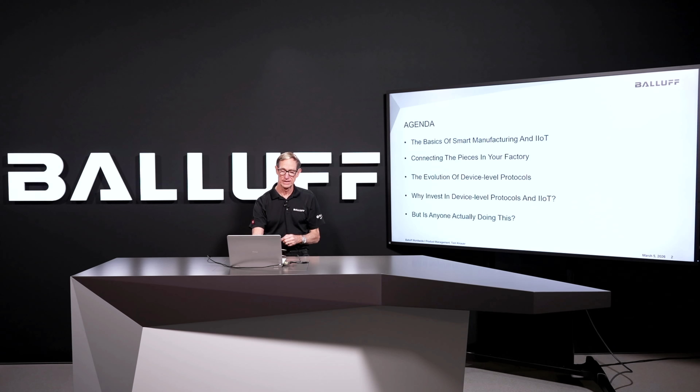Then why it's important to invest in the device level protocols and IIoT. And then we'll get into some real life examples of how people are using this, including a short video that takes you through an actual application with multiple different aspects of a factory and how those are all connected together and how that data can move up into higher levels of the factory wherever it's needed.

So let's get started. So some of the key trends that are driving the manufacturing world include things like changes in the workforce, inflation, tariffs and trade issues, constant pressure to reduce costs, use of energy, shorter supply chains, mass individualization and lower product counts in terms of high volume, low mix, and also at the other end of the spectrum, high mix and low volume.

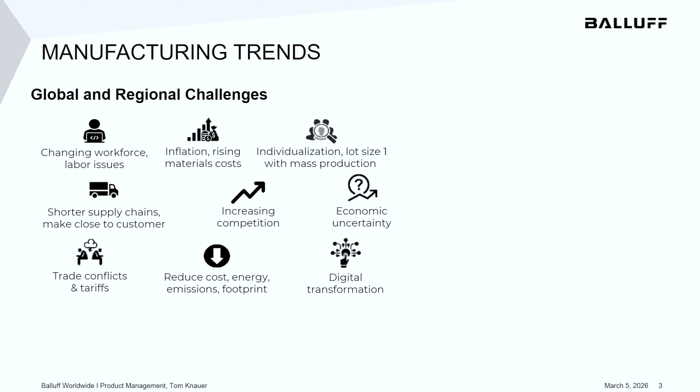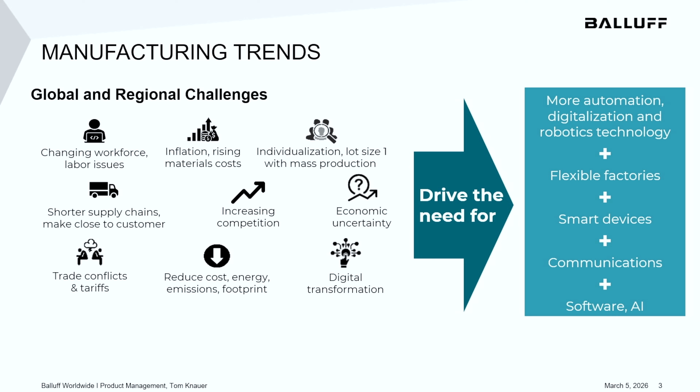These things drive a broad range of needs in the automation world. Primarily things like more automation, digitalization, and robotics, more flexible factories, smart devices, the communications to connect those smart devices, and then software and AI all play a role in bringing this picture together to help manufacturers address these key cost pressures. Really, the key thing here is that manufacturers are constantly being driven and focused on being more efficient, getting more out of their equipment and their facility, and improving overall equipment effectiveness.

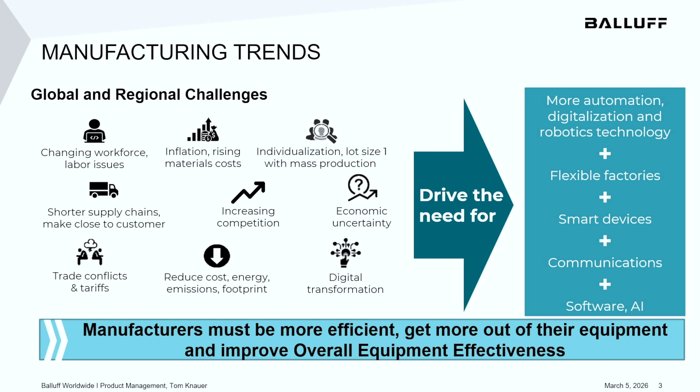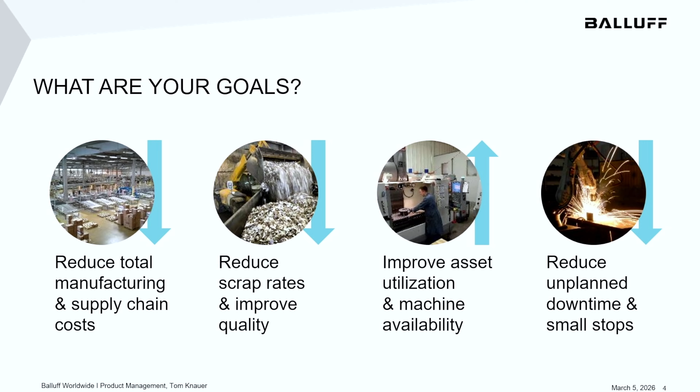What does this mean for your manufacturing goals? When we talk to customers, there's a variety of things they're focusing on when they're talking about overall equipment factory effectiveness and getting the most out of their factory. They want to reduce their total costs, both in the supply chain and the manufacturing side of things, reducing their scrap and improving their quality, improving asset utilization, machine availability and uptime, and reducing unplanned downtime and the small stops that occur that disrupt production.

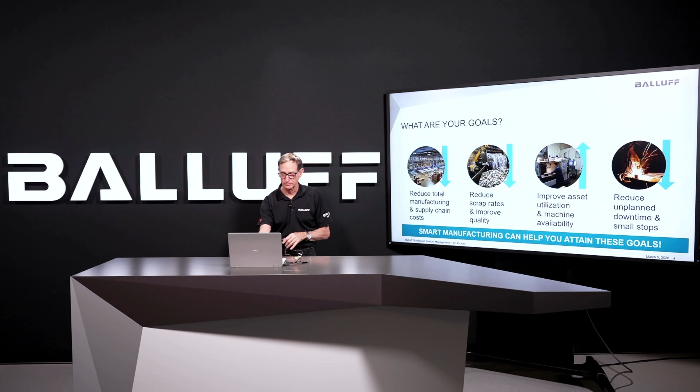These are all part of a smart manufacturing system that can help you attain these goals, using IIoT and smart manufacturing solutions to get to improvement in these areas. So what are the basics of smart manufacturing? When we talk to customers, they're focused on three things: efficiency, flexibility, and visibility. And we'll take you through a little bit about examples of these and how they can, again, affect overall equipment effectiveness and efficiency in the factory.

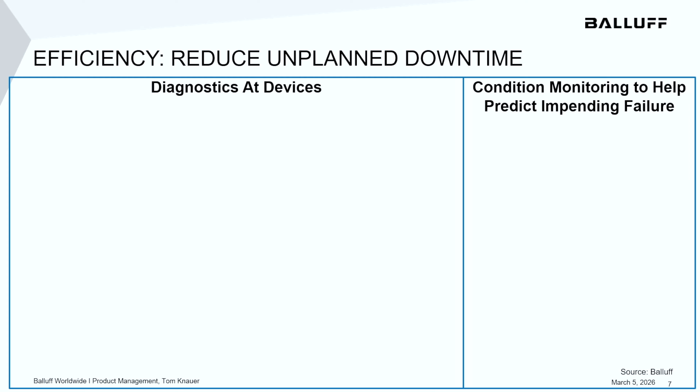So first of all, efficiency. We focus here on unplanned downtime, which means having diagnostics at the devices. So this is where we start to talk about having enhanced information that's available both at the device and in the higher level control system. Things like networking blocks that have information displays, the LED indicators to indicate status, and device indicators at the individual connection points that tell you whether the device is functioning properly or is shut off.

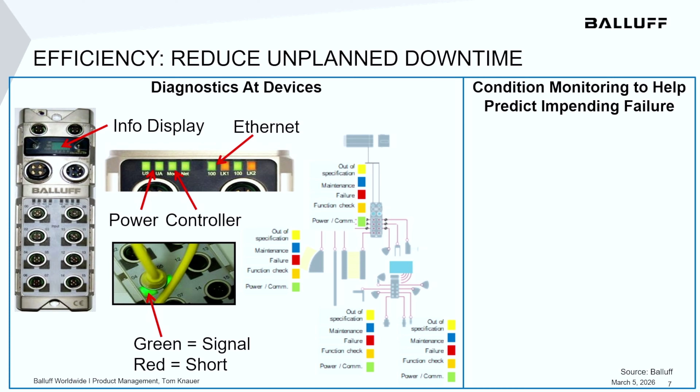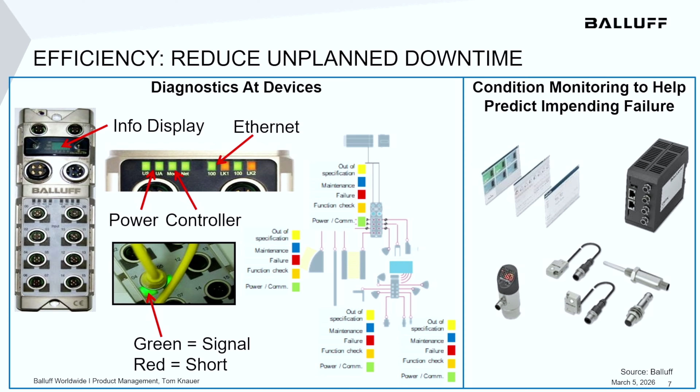We also talk about condition monitoring. Condition monitoring systems that help you gather data out of the sensors and assess the condition and what's happening at the machine or on different parts of the machine. These things all connect together to help you reduce unplanned downtime, and as you connect all the pieces together, you've got common interfaces, common signaling methods, whether we're talking about the condition monitoring side of things or individual sensors or other devices that are connected to this.

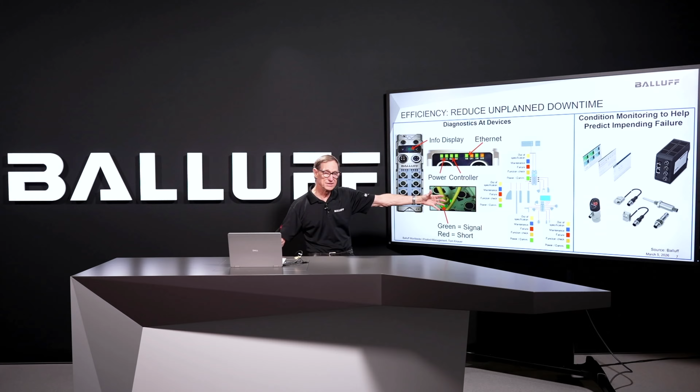You have a network and a common way of looking at things, and you can quickly and easily get diagnostic information at the device to reduce your downtime, but also take that information and network it up. And we'll talk a little more about the networking aspect of this.

Flexibility. Meeting the demands in this high mix, low volume world, but also the high volume, low mix world. We have examples of customers who are very focused on this manufacturing flexibility. For example, we've got a customer who makes ATVs and has about 96 different variations of the powertrain on that one production line.

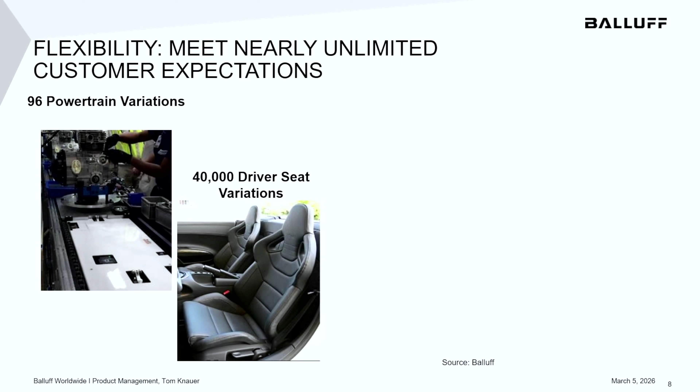They have to be able to adapt to each different powertrain as that is moving down the production line and adjust on the fly. We've got another customer who's making seats. They've got 40,000 different variations of seats that they make on that line. And they have to be able to, again, adapt that process for each different seat as it comes without disrupting and stopping the whole manufacturing process for changeover.

And then finally, shoe manufacturing. Nike has the ability now to configure your shoe online and have that shoe produced to your specific needs, your specific size, your specific color patterns, your specific model. This, as we see it, goes from relatively simple flexibility to very high flexibility manufacturing systems that can produce a wide variety of products on the same production line.

So what are the things that enable this? This is all done through IIoT and smart manufacturing. These are the things that enable this. We're talking about smart devices, the networking communications to connect those devices, robots and cobots and automated machinery, digital transformation and software, vision systems, traceability, 3D printing, condition monitoring, machine safety, and other things. Integrating all these different parts of the manufacturing system together is made more efficient and more simple when we start to talk about IIoT and smart manufacturing.

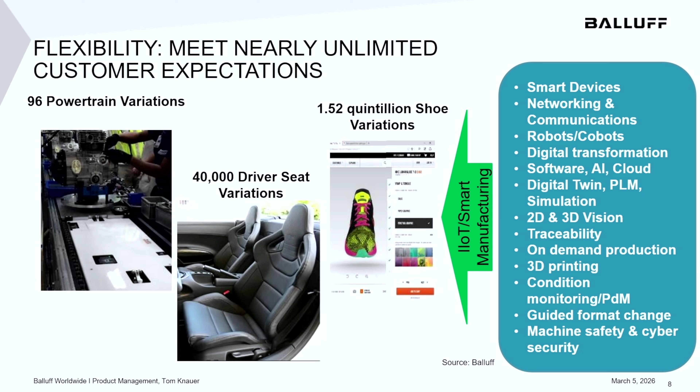The final aspect that we talked about is visibility. We've got a wide variety of people in the facility. We've got people on the shop floor. We've got managers that are responsible for different areas of the facility. We've got an overall manager maybe for the complete plant, and then maybe global people. They're all looking for information in a different way.

We've got fewer and fewer support staff on the floor. We've got 24/7 production. We've got people who are working remotely. And we all need to have this information flowing together to those people in their different roles.

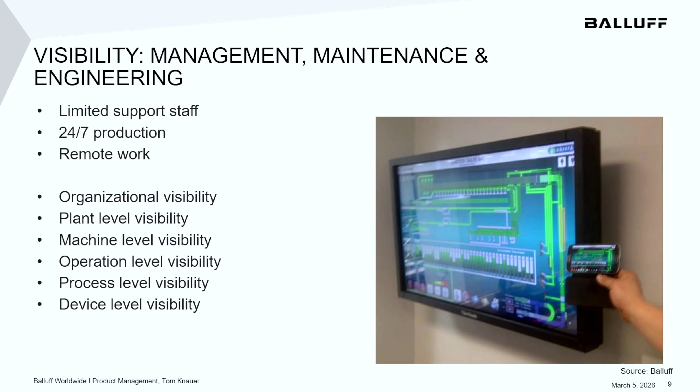And so we can see we want to start to have visibility at the high organizational level, plant level, machine level, and so on down to the individual device on the floor, so that wherever a problem occurs or whether we're facing challenges in the production system, we can quickly and easily troubleshoot and address that, or just gather the ongoing process data to help us manage our overall factory or our groups of factories or our cells on the factory floor. So the key thing is that we're able to access this information anywhere in the world. Again, whether it's on the shop floor, at the factory, or at the global headquarters.

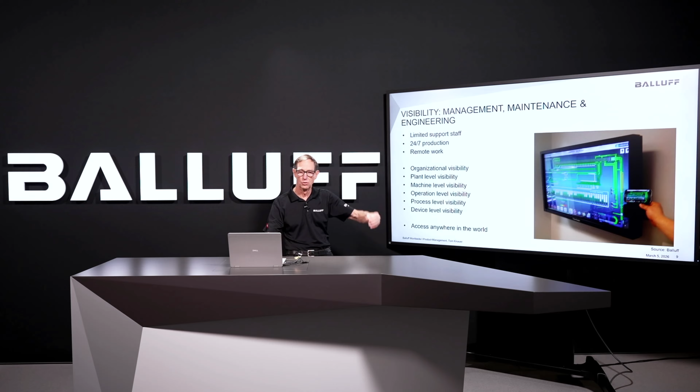So what does this play in terms of the realistic implementation on the shop floor? We've got data coming from many different places, many different machines, or different components of machines even, and we need to think about how we enable that information that applies to our efficiency side of things, our flexibility side of things, our visibility side of things, and tie that all together. And this is, again, where smart manufacturing and IIoT come into play. So how do we connect all these pieces together?

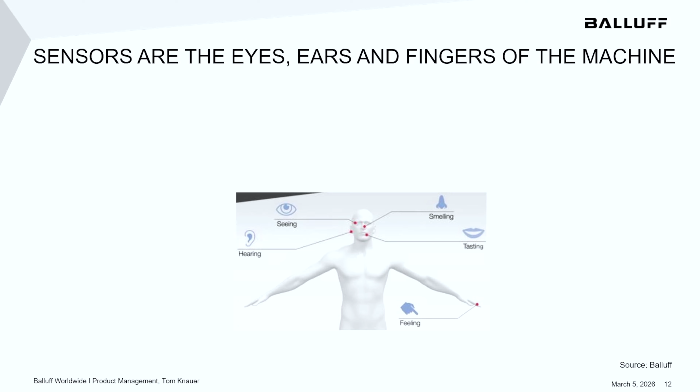Well, let's start by thinking about the basic sensors. The sensors are the bottom level of the factory, the basic level where the data is being gathered and started. Think about a human body analogy. The sensors are basically your eyes and ears, fingers, touch. They are gathering that data from what's happening. You also have things like, similar to your hearing, RFID systems. You have the nerve pathways, which are connecting all these devices.

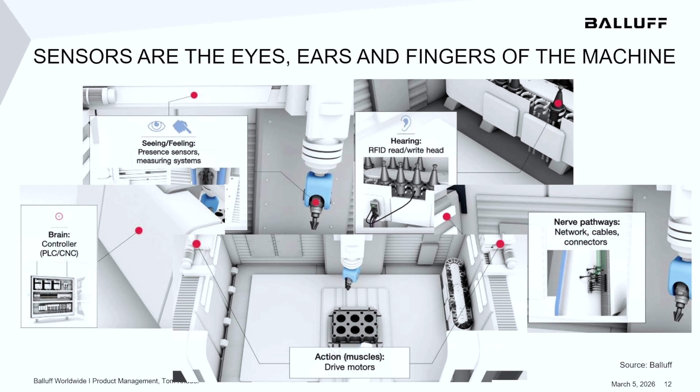You have the brain, which is the controller, such as a CNC controller, motion controller, or PLC. And then finally, you have the actuators, which are the muscles. And so these are all tied together, similar to a human body, by nerve pathways. You've got the brain doing the control systems. You've got the fingers and the eyes and the ears doing the sensing. And then you've got the muscles that are moving things.

So let's talk a little bit about the sensors and the devices you start to see on the machines. There's a wide variety of sensors on the machines and applications in the factory, depending on what you're trying to accomplish. You may have vision systems, inductive sensors, photoelectric sensors, magnetic sensors, mechanical position sensors, vibration sensors, safety sensors. But we're not only talking about sensors.

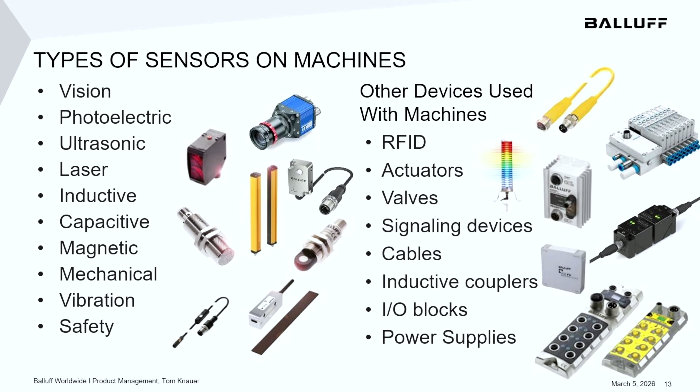There's lots of other devices that are on a machine or on the factory floor and pieces of equipment. Maybe RFID for traceability. You've got your actuators, again, your motion control, whether it's servo motors or linear motors. You've got valves and signaling devices, cables, power supplies. All this different equipment is existing to make one or more functions on the factory floor happen.

So the question is, how do you tie all this together in an efficient way? Because integration can often present a wide variety of challenges. If we're talking about wiring all these things back to a central control cabinet for a PLC or a CNC control, we can talk about many long cable runs back to the cabinet, lots of terminations that take a lot of time to connect into that cabinet.

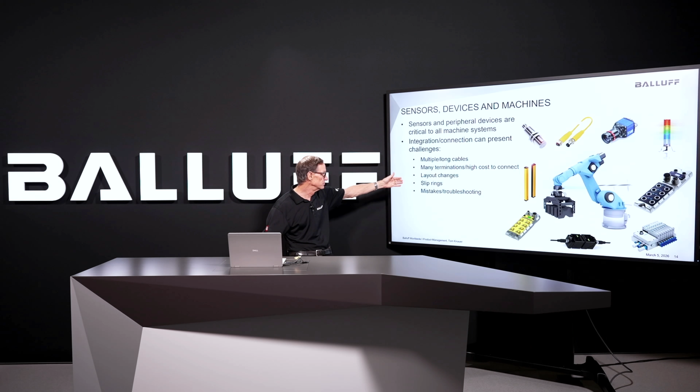What happens if you have layout changes? It makes it difficult to do that and to trace things. You've got slip rings often where things are moving to send power and signal across moving axes. And then finally, troubleshooting can be a big challenge because you don't know exactly which sensor or which device has failed without extensive troubleshooting.

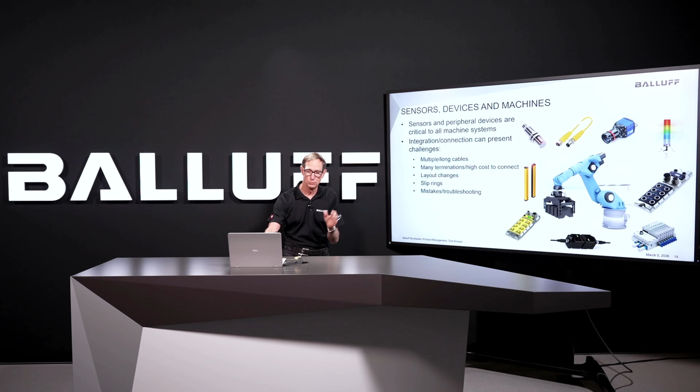This is where we start to talk about device-level protocols coming into play to enable much simpler and easier connection, scaling up and down of systems, using open architecture and open controls, and making it easier to troubleshoot and address these problems that we often see by hardwired systems.

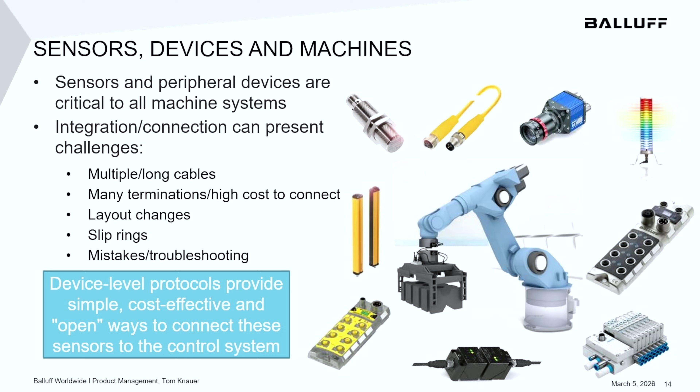That's connecting the control system to the enterprise level, the control system to the cloud, or the enterprise system to the cloud. Generally, we're talking about Ethernet-based systems. Between the factory data gathering systems and hubs and blocks, we've generally used some kind of an industrial Ethernet, such as EtherNet/IP, EtherCAT, or Profinet. We're also talking about using those control-to-control connectivity, PLC to PLC, CNC to CNC.

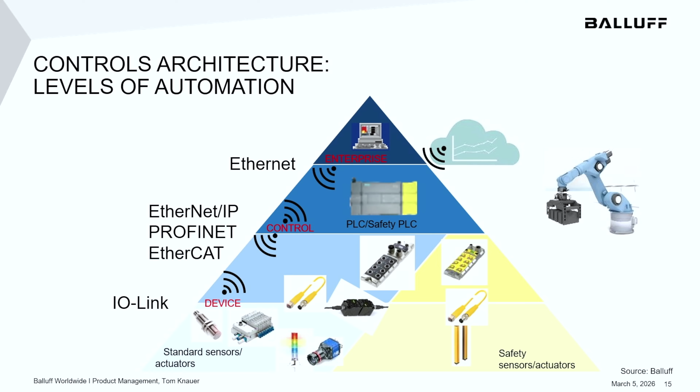And at the very bottom level now, we're starting to talk about device-level networks. Instead of doing all that hardwiring back to the PLC, we're starting to do the same kind of networking or similar networking that we have at these higher levels, connecting the individual devices through some kind of a networking block, and then that block resides on an Ethernet-based industrial protocol.

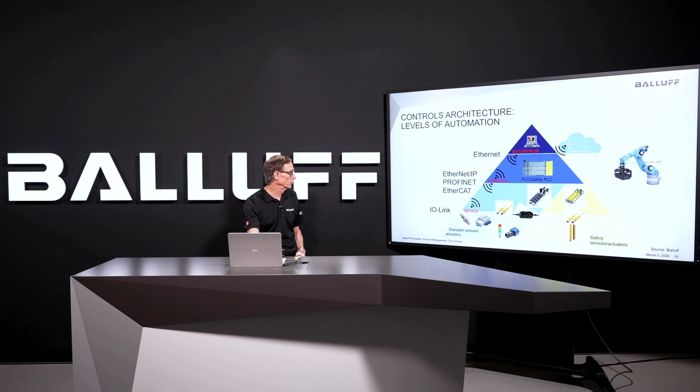The challenge is we have to use one IP address per each connected device. The chipset built into those devices can be large and fairly expensive, and adding each device to the network can be fairly expensive. On the other hand, device-level protocols, there's a variety of them up here, and we'll talk a little more about those, are good for connecting the sensors to the networking blocks, right? And then those networking blocks will reside on the Ethernet industrial-based protocol.

The data transmission rates are a little bit lower. The amount of data is significantly lower that can be transmitted. The distances are shorter, but we're also not using as many IP addresses. Each individual sensor and device doesn't need to have its own IP address. The IP addresses are only assigned to the blocks that connect the signal from those.

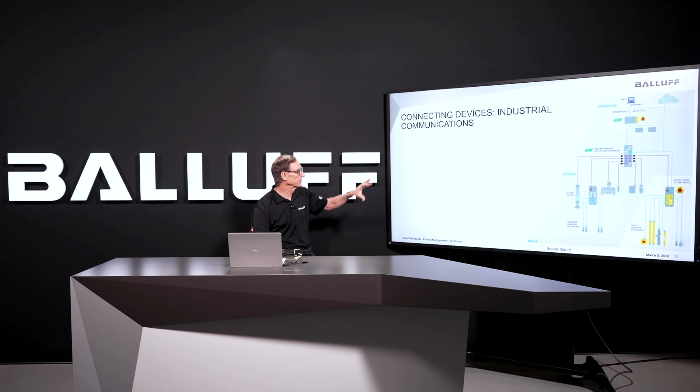The chipset is much smaller and less expensive. You can put the IO-Link chipset into a very small sensor, and so the cost to add that chipset to each device is much lower. So how does this look, again, in the factory environment? We've got the pyramid that came from one of the previous slides.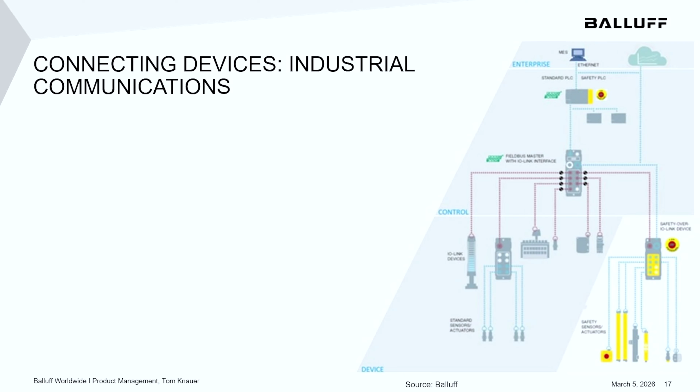Again, your devices and sensors at the lowest level, your networking blocks and connectivity devices in the middle level, then up to a higher level block or a higher level networking system, the PLC or the control system, and then finally some kind of an enterprise management system or even the cloud.

So the reality of the connectivity, when you look at the pluses and minuses of this, is that you're going to have to probably implement multiple protocols for multiple levels of the factory. Generally, again, the Ethernet protocol is good for high amounts of data, high-speed transmission, high-speed connectivities, really good for PLC to PLC and higher connectivity, but it's not going to be cost effective and it's not going to be efficient to put that down into every sensor.

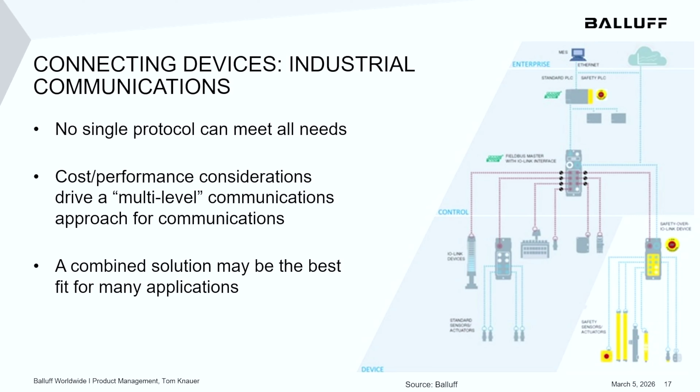That's where the IO-Link and the device level protocols come into play. Lower cost to connect, can carry the right amount of data at the right speed for those devices. You can still have real-time control. They're very fast for that. But again, limited in the amount of data. You're not going to want to connect a PLC to a PLC using a device level protocol. The data capability and the speed isn't there.

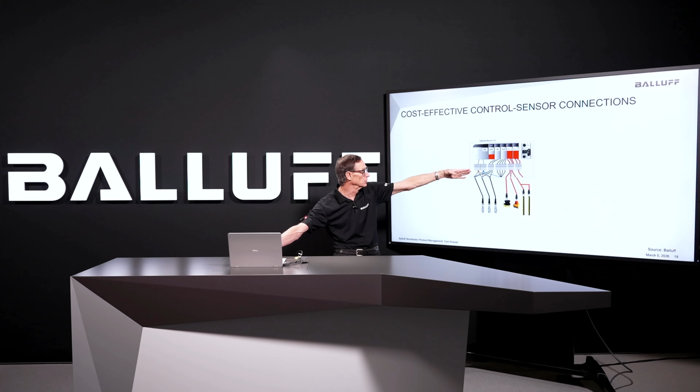So let's talk now a little bit about the evolution of these protocols. When we look at the history of the evolution of PLC to device connectivity, we used to hardwire everything back to the cabinet. I talked about this. Lots of cables going back in, lots of terminal blocks for the terminations. Each one of these has to be individually wired and connected. And then you've got many different I/O blocks in your PLC rack depending on how large the system is, including specialty block rack interface modules for safety.

So as we started to move to device level protocols, we started to be able to be more efficient in the way we connect things. We could get rid of these multiple terminal block runs out to the device, and we could start to use a single network interface, connect those devices with very short cables and off-the-shelf cables to a block, and then daisy chain those blocks one after the other down the row, meaning much less cabling, much simpler cabling, off-the-shelf M12, M8 connectors to make the connectivity quick, simple.

As we got even more advanced, we started to be able to expand this concept to the safety world. So going from standard to now using the same concept of this hub or block and networking system rather than individual cable runs all the way back to the system.

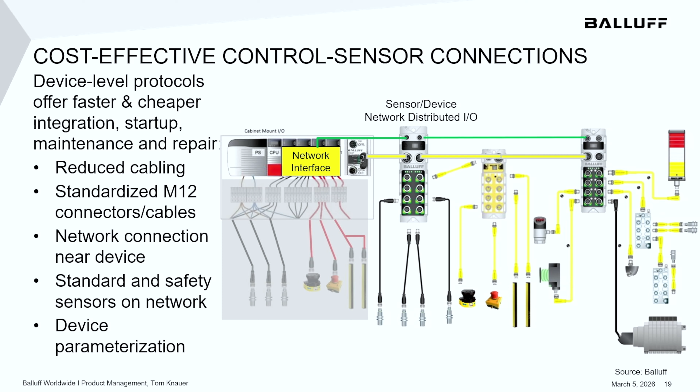And then the final thing was adding capability for protocols like IO-Link, which had much broader capability, not only to get the on-off data or the analog data out of the sensor, but also do things like parameterization, device health checks, and so on, taking that added bandwidth and added data capability that the protocol brings and that the chipset built into that device brings, so that you can now have enhanced data and information coming out of that sensor rather than just is something there or isn't something there or the analog values.

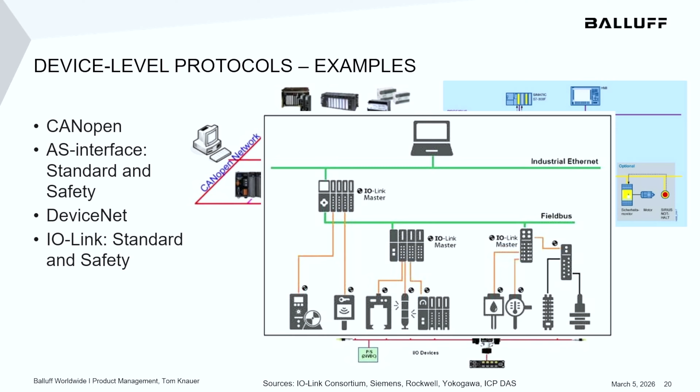So let's talk a little more about some examples of device level protocols. Some of the most well-known ones: CANopen, the AS-Interface and AS-i Safety standard. We've got DeviceNet, and now we have IO-Link, which has both standard and a safety standard that's come out. IO-Link has really started to take off for a variety of reasons. It's broadly supported, and we'll talk about that in a minute.

So why do we want to talk about IO-Link here? Well, it's a real nice, simple point-to-point connection system, generally using M12 cables. There are versions that allow you to connect to M8 devices, but they're off-the-shelf, inexpensive, standard cables. You can get them from pretty much any industrial automation supplier.

You can connect both IO-Link devices, but also non-IO-Link devices. So if you've got a mix of sensors out there, there's some that you want to get that additional IO-Link data from. You can connect those to the same networking block that you connect your existing standard sensors that just give you that on-off signal to. So you can have a mix of sensors and different types of devices out there.

You're able to very easily connect to pretty much any industrial Ethernet protocol. These blocks, we call them master blocks, that connect down to the lower level IO-Link devices can now speak EtherNet/IP, EtherCAT, Profinet, and so on, a wide range of different Ethernet protocols.

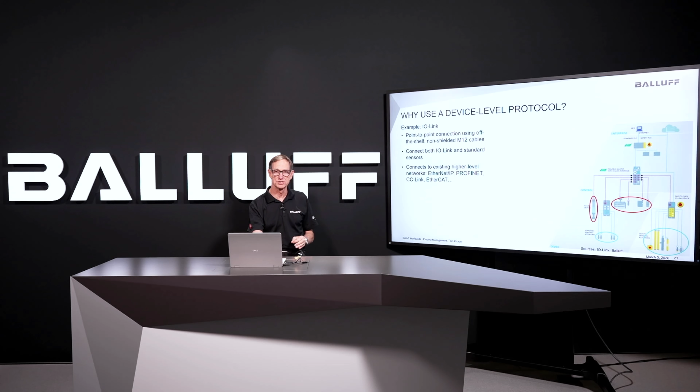And now there are many, many different varieties out there that are already multi-protocol, where you buy one specific master and it can talk and self-identify whatever network it's been connected to. You don't need to buy a special flavor. You don't need to do configuration of the network that you're connecting to.

And then the other key thing here about IO-Link is that it's an open standard. With many suppliers, more than 400 suppliers already on board, pretty much every major industrial automation supplier has some IO-Link devices, and there's tens of thousands of devices out there in the IO-Link library. And the other key thing about this standardization and the open protocol is that you can pretty much connect any supplier's device to any IO-Link master, and it should work.

You don't have to stay with one device supplier, one sensor supplier, and one master block supplier. You can buy from anybody else, so you can mix and match best in class devices, or if somebody doesn't supply a device, you can go out and find a third party that generally will. And so you've got a very broad range of solutions out there.

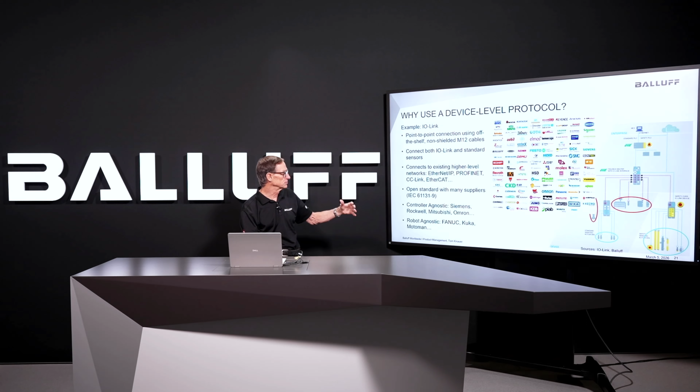The other thing is that you've got a standard organization that's made up of many different suppliers, the managing body of this, and they make sure that there's compliance with the standards and with the configuration so that the devices will work together. So the other key thing here, as we mentioned before, is that it connects to any higher level network, which means it's controller agnostic. So whether you're buying Siemens controllers, Rockwell, or so on, you can connect the IO-Link master to that appropriate network.

And it's also robot agnostic. Most of the robot suppliers have some kind of interface block that works with one of these higher level Ethernet protocols, so you can connect an IO-Link master into that protocol and work with your robot of choice.

So let's talk a little more about IO-Link specifically in the data. Again, I mentioned we don't only have the process data itself, where you get the on-off signal from the device. So let's say it's a photoelectric sensor that's detecting part presence. Is the part there, is it not? But you're also getting additional data, service and device data that tells you about the device itself, whether it's data like internal temperature or number of cycles or so on.

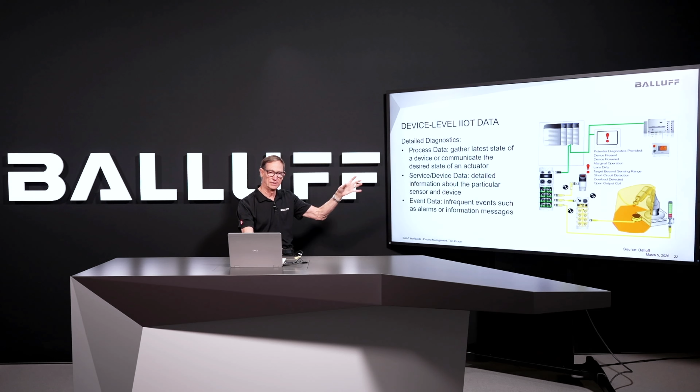And then you also can set up event data, special alarms and special information that get triggered on a special event, so that maybe you're doing a thing like a counter where after 100 counts, you want to set an alarm to have somebody come over and just reset the machine or do something. You have a broad range of capabilities in IO-Link that you don't have in a normal standard sensor, which normally only would provide the process data, the on-off or analog signal.

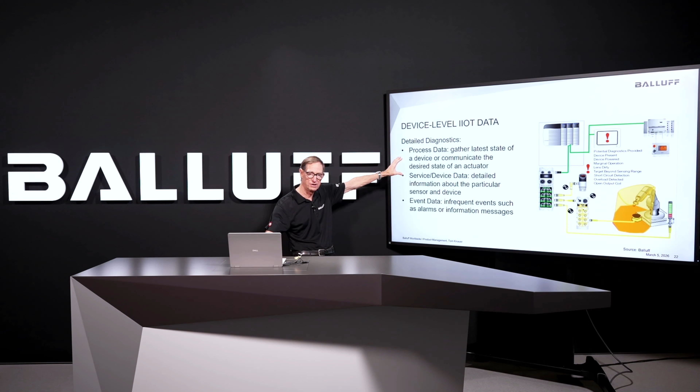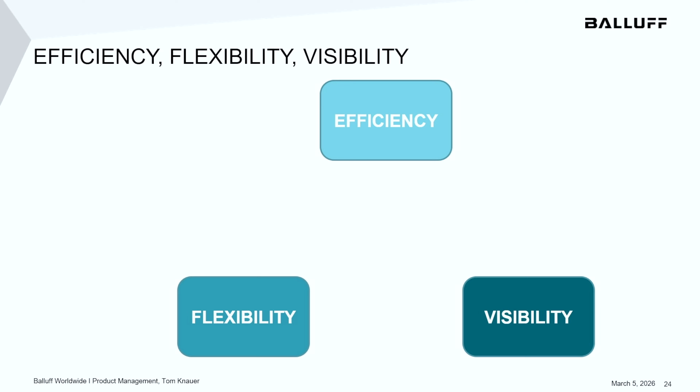Now let's talk a little more about why you might want to invest in IO-Link or in a device level protocol. We talked about efficiency, flexibility, and visibility as three of the key things that our customers have been working with us on. Well, data is the critical element. Data is what makes your machine and equipment efficient and can help you drive to higher levels of efficiency. Data is what helps you make the flexibility in the facility, and data is, of course, what you're displaying on the visibility side of things.

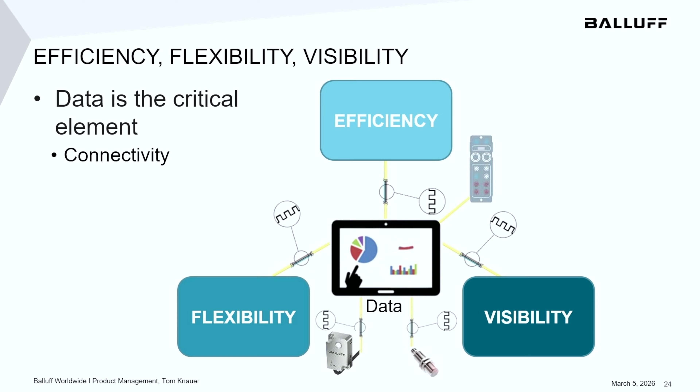So you've got your devices and you've got the data. Well, how do you bring that together? Well, first of all, you've got the connectivity. Again, the ability to connect each of these devices through a standard off-the-shelf cable to a central block that gathers that data is made very simple and easy by IO-Link.

The device network, again, takes that data, and in the case of IO-Link, not only the on-off or the analog data, but also that additional machine data. So you've got even more data that you can start to use in your process to make things efficient.

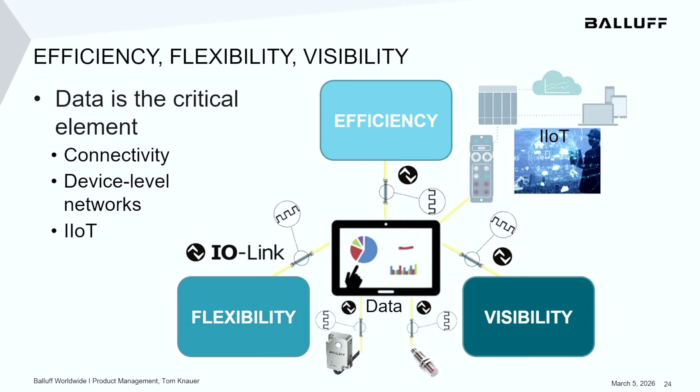And then finally, you can connect out through these devices, through these blocks, to higher levels of the hierarchy, whether it's your controller, whether it's your factory management, SCADA or MES system, or even the cloud. You have very simple, easy connectivity to take that data from the device itself, through the blocks, and then out to wherever you need it.

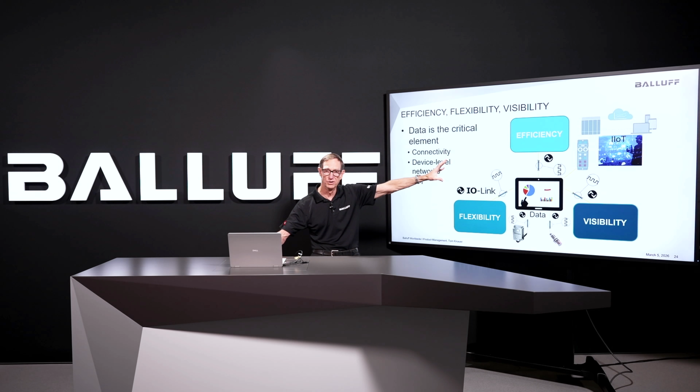And it's plug and play, so that you plug the device in, the block can be very quickly and easily configured, and then that data can be very quickly and easily configured to be pulled out to where it's needed at the highest levels of the factory. So as we see, we've got all these different points of data. We want to be making sure that we can easily and quickly connect that and gather it and take it to where we need it.

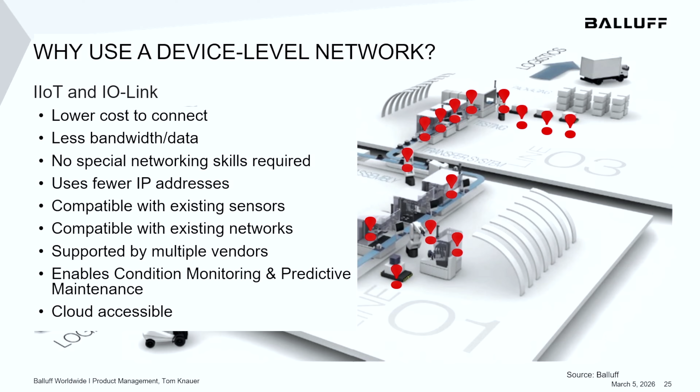So here are a long list of the benefits. We've talked about the easier and lower costs to connect. We've talked about no special networking, fewer IP addresses, compatible with existing sensors and networks, supported by many different vendors. Condition monitoring data and predictive maintenance data can come out of the devices now, and it's cloud accessible. But is anybody else actually doing this? So here are some real world examples.

The first one is a smart cell. In this case, we've got a customer who is doing end effectors on a machine, and they need to do tool changes. And so they've got a bunch of different end effectors that they change. So what they've done is they've put their I/O, the sensors and sensor connect blocks on the end of the device, and then they do a quick and easy tool change.

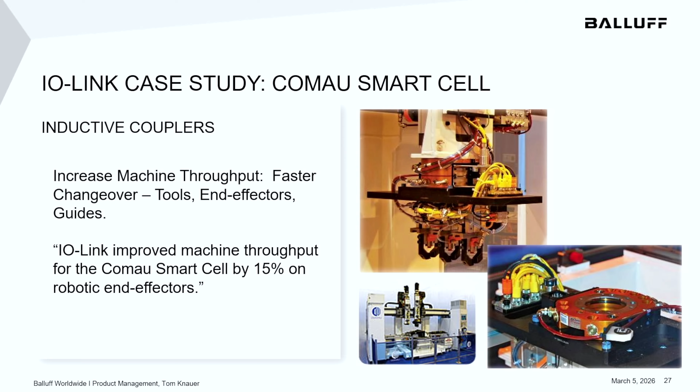That's enabled by having what we call an inductive coupler, which instead of having connectors on it for each connection and disconnection and change of the tool, you have data and power brought over an air gap, which allows for much quicker changeover. As quoted by the customer, they had about 15% improved throughput and speed of changing the tools because they didn't have to connect and disconnect manually.

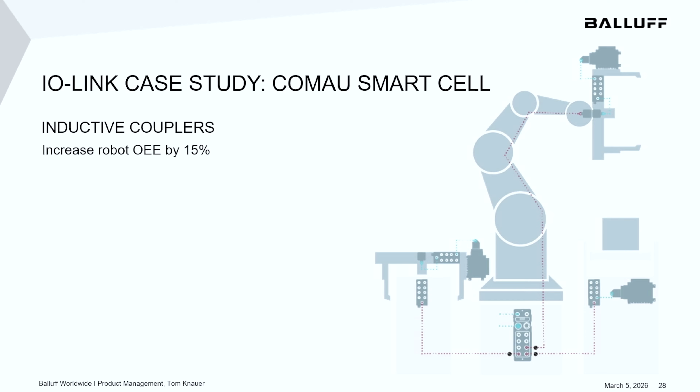So if we look, this is the diagram of what they had. Everything had to be manually connected. You can see now, however, that you've got an air gap connector, rapid changeover, less maintenance because it's a non-contact connection. Those connectors that connect and disconnect wear out over time or bend. And then again, you have the flexibility to have one robot do quick and efficient tool changes where you can use one robot for multiple tasks rather than having to have multiple robots that have fixed tooling on the end.

Next one here, they were talking about consolidation of cables. We talked early on about the evolution of a control system where you had long cable runs. In this case, they've had some long conveyors. In the past, they would have had many, many different cables, big bundles, running all the way back to the control cabinet. In this case, they were able to network using an Ethernet-based protocol out to device blocks.

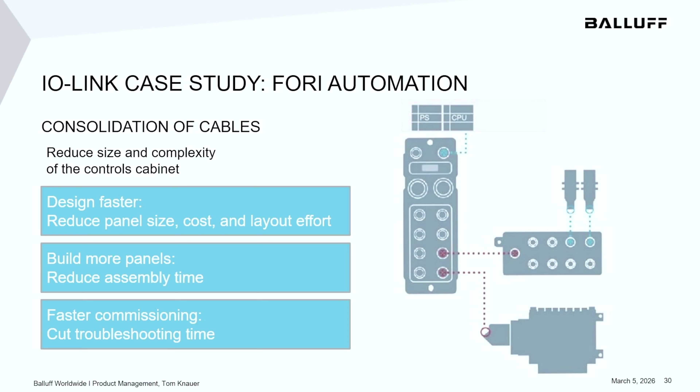Much faster design, reduced size of the panel. They can build more panels in the same amount of time, and then much faster to troubleshoot because the individual data coming out of each sensor can tell you if there's something wrong or not, and you can trace it very quickly and easily down to the individual sensor or individual block or individual cable.

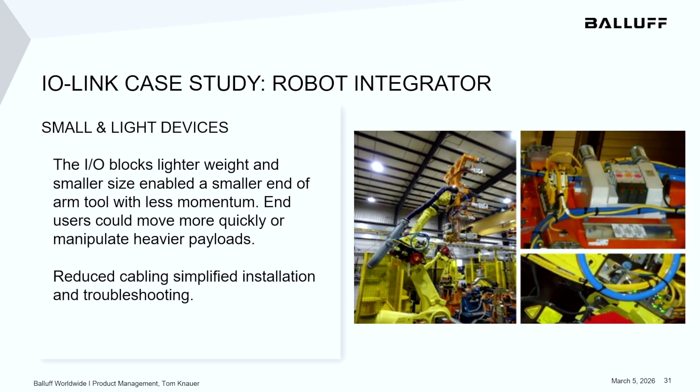Another one here, another customer, their key factor was the weight in the end-of-arm tooling. The less weight you have in terms of devices and the end-of-arm tooling itself, the more weight you can carry in the things you're picking up and moving. So by doing that, you can either lightweight the total system or you can carry heavier parts. In this case, by using special I/O blocks and reducing the amount of cabling, the customer was able to dramatically reduce the weight in the end-of-arm tool and therefore, in some cases, use a smaller robot or carry heavier things.

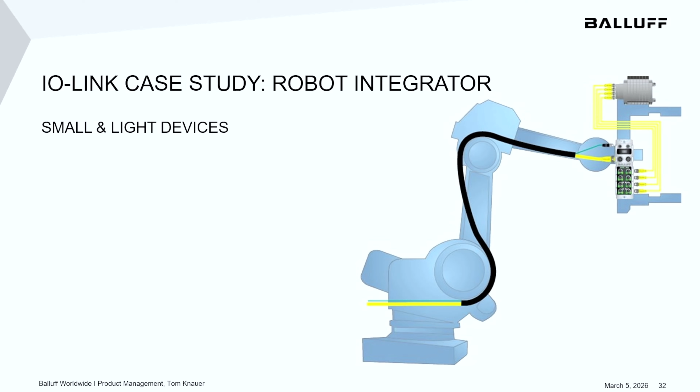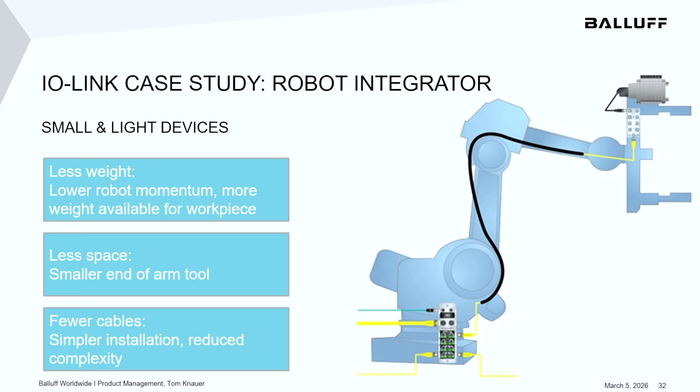So here we see again an example of the end-of-arm tooling. This is a more traditional approach, very large block with lots of cabling coming out there, large valve manifold. We're able to dramatically downsize that and downscale it, much lighter blocks, and using IO-Link to run back to the machine versus lots of heavy cables. So that means less weight on the end-of-arm tool, less space needed on that end-of-arm tool, which also allows you to downsize it, and then fewer cables, reducing the complexity, improving the troubleshooting.

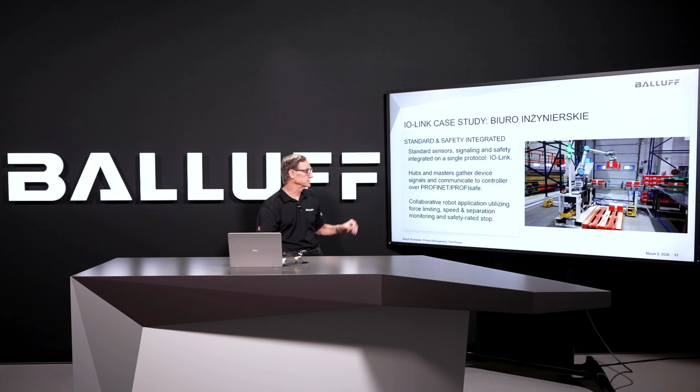This example here is a company that is building palletizing systems. They had a wide variety of sensors on the robot, including standard sensors, some signaling devices, safety. They needed to integrate all this together. Rather than running lots of wires back to the control cabinet and scaling it up or down depending on the customer, because this is a prepackaged system, they deliver various sizes and versions of this to customers.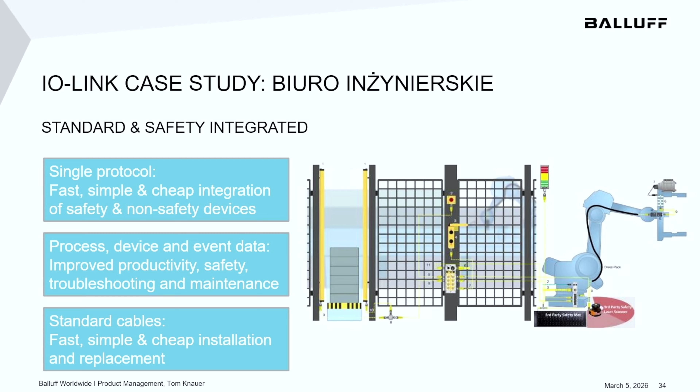So it's a single cable, single protocol. They're able to get, again, that additional data out of the IO-Link devices, not just on-off, but also troubleshooting data. And then again, they can use the standardized cables rather than running special cables back to the cabinet and having to terminate each one.

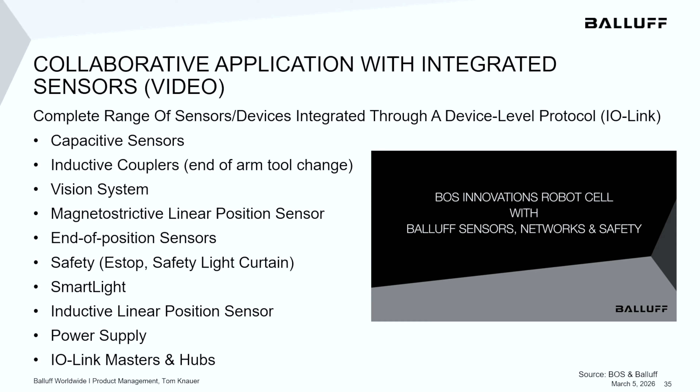So as we get to the end here, I've got a final real-life example. We're going to take you through a video of a work cell that a customer built. And it integrates a wide variety of sensors, signaling devices, actuators, and so on, technologies, all through the use of IO-Link.

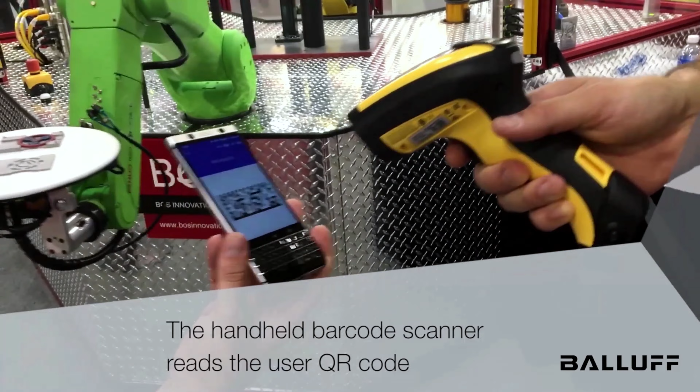So here, the process starts scanning a barcode using a network barcode reader. We touch the capacitive buttons to start the system, and the robot now moves over to the next workstation, takes the two initial work pieces and moves them to the first workstation and presents them to the next robot for the next solution.

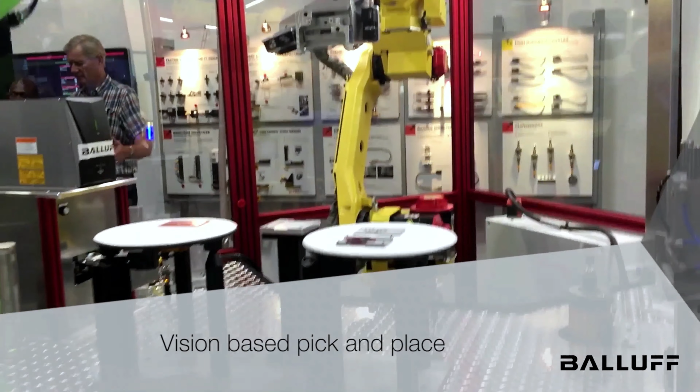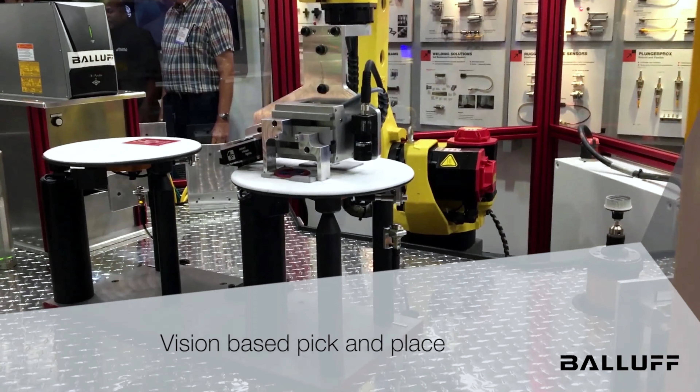Key thing here is you've got an inductive coupler that is on the end of arm tool. So the first robot can change out the end of arm tool using the air gap for both signal and power because there's sensors on that platform there. This robot scans with a camera. The grippers are networked. The position detection in that is networked also through IO-Link.

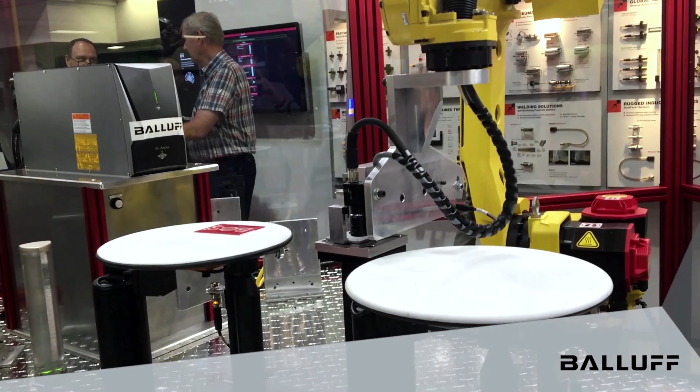The sensor on the stand recognizes that the part has been presented. The robot adapts the gripper to pick up the second part and do the next function. All this data, all the position data, all the presence and object detection data is being networked back over IO-Link.

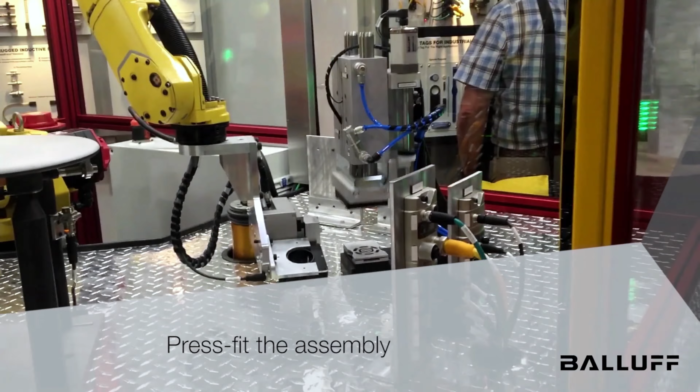And as we move through the process, you'll see a variety of different IO-Link devices that are detecting presence, detecting position. So for example, the press here, the up and down position, has a linear actuator. Its position is being measured by an IO-Link sensor. In the front here, you can see two of the IO-Link blocks that are networking that part of the work cell over on the right.

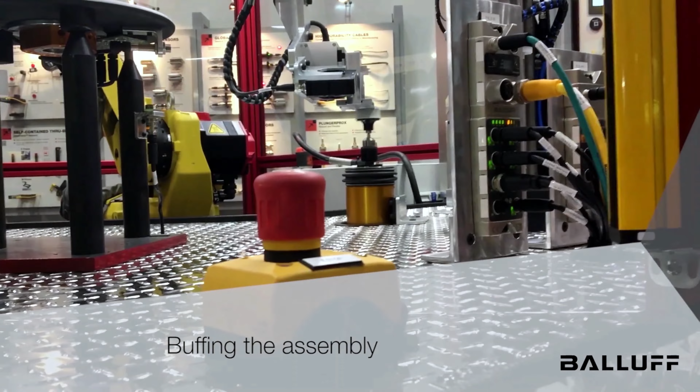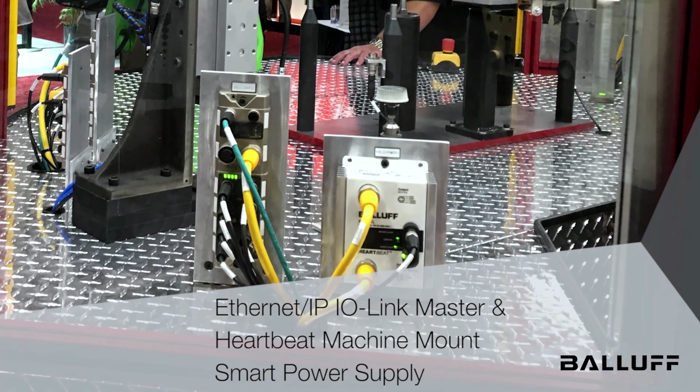You've got a safety e-stop that's also networked over safety over IO-Link back to the safety controller. More of the IO-Link blocks here on the back side of this process. Again, more sensors detecting presence, detecting the closing of the shelf. You've got IO-Link signaling devices. Those were the smart lights. Here we're just managing the operation.

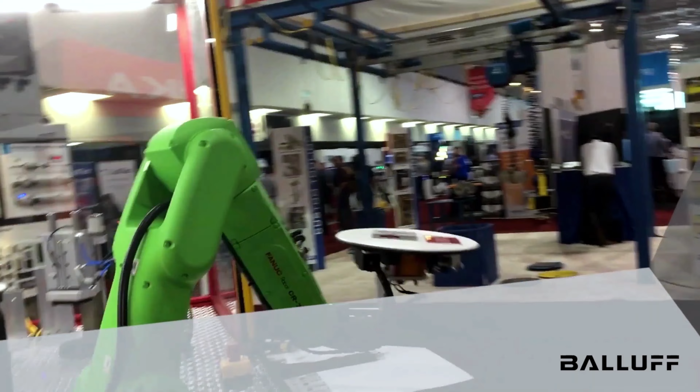And as the part finishes, it's being presented back. The gripper again is detecting that it's gripped the part properly, connected back to IO-Link. We're now doing the other tool change here. You can see the light is indicating that we've made the connection. And the final part is being presented now back out to the operator. And you can see here we've completed the manufacturing operation.